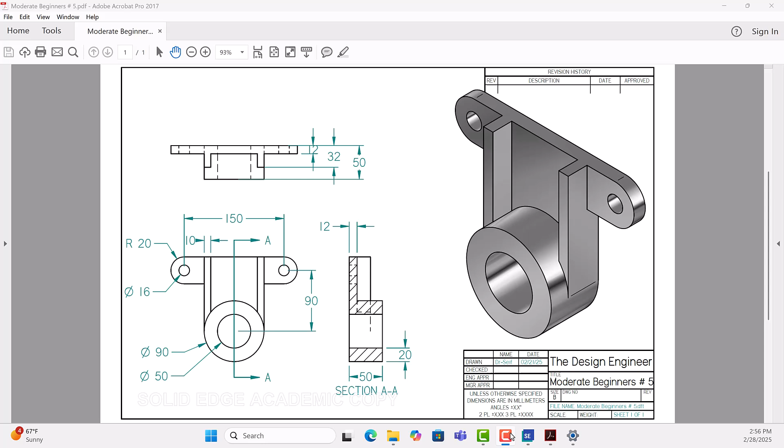Without further ado, let's go to Solid Edge. This is the main menu, and what I'm going to do is click on New.

I need the part, so I'll click on this one, ISO metric, since the dimensions are in millimeters. So I'll click on ISO metric part, click on this one, and say okay.

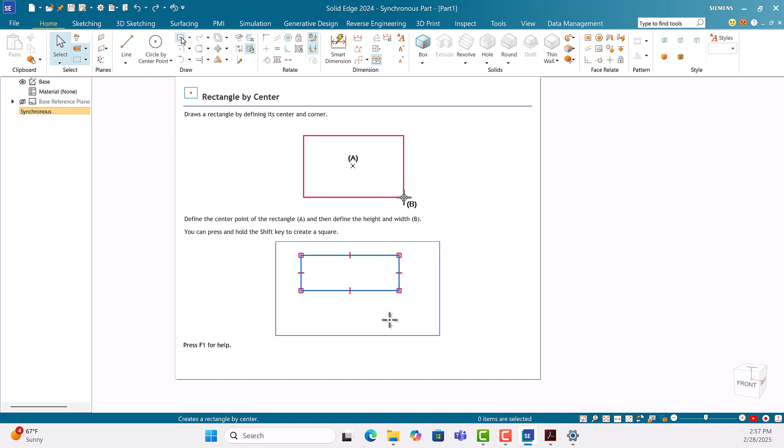As I mentioned, I'll start first with rectangle by center. So I'll go to Home, click on rectangle by center, and at the beginning don't put any dimension, just click on one of the drawing tools. So I'll click on rectangle by center, and the menu will come up.

I'm going to put it in from the other screen. So here is the menu, and at the same time all the projections have been revealed.

First, before I put any dimensions, I'm going to lock myself to the front projection. Once I touch any line of the front projection—this is front projection, this is the top projection, and this is the right projection—I'll touch any line in the front projection and click on the lock. Once I click on the lock, you see the lock posted in the upper right corner.

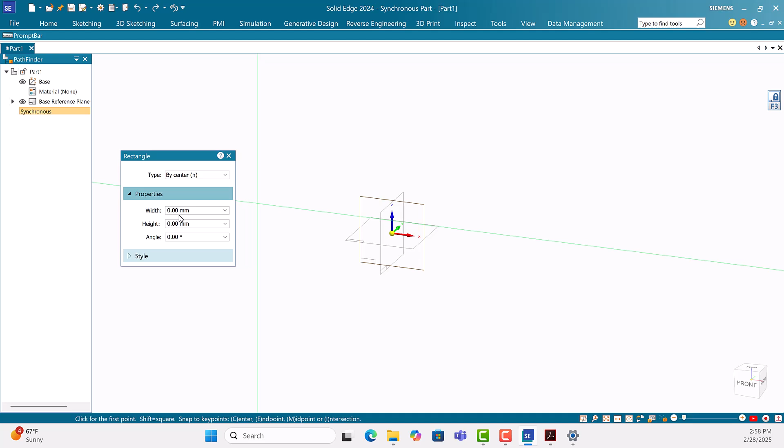Now that I'm locked, I can start putting in dimensions. We said the length or width is 150 and the height is 40, and the angle is 0. So I'll go to the cube, click on the front projection to get that front view, and take the rectangle and touch the center.

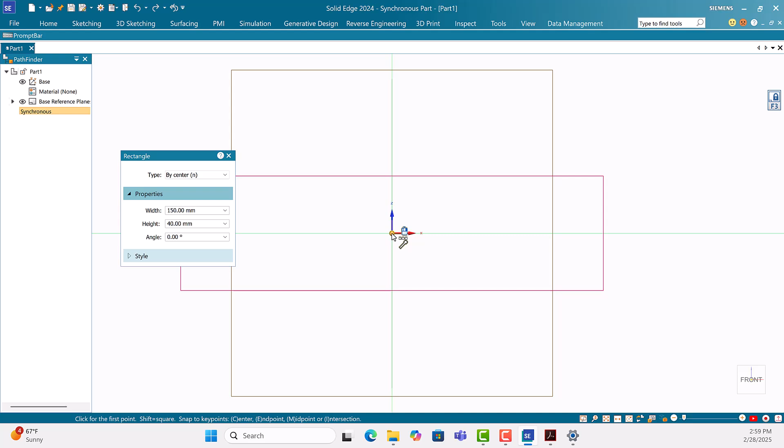Once you see the center of the coordinates, the center becomes orange, so click on the orange. Okay, I got it.

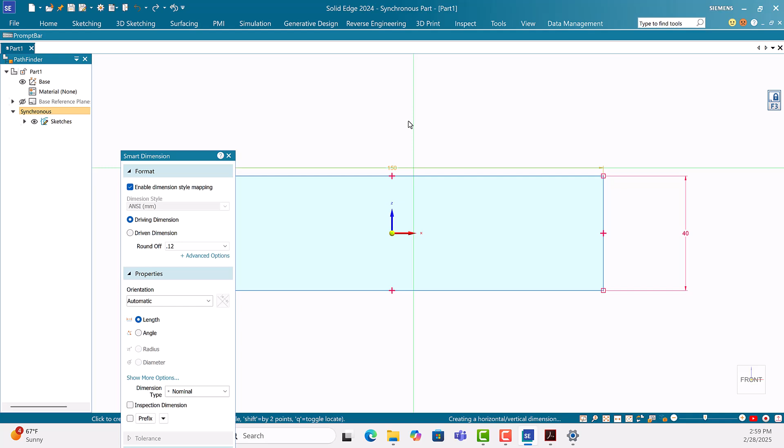Now let's make sure the dimensions are correct. I'll go to Home, get Smart Dimension, touch the edge here—this should be 40. It is 40. And this should be 150. It is 150. I'm going to use the roller to reduce the size so I can move it, and then move it up.

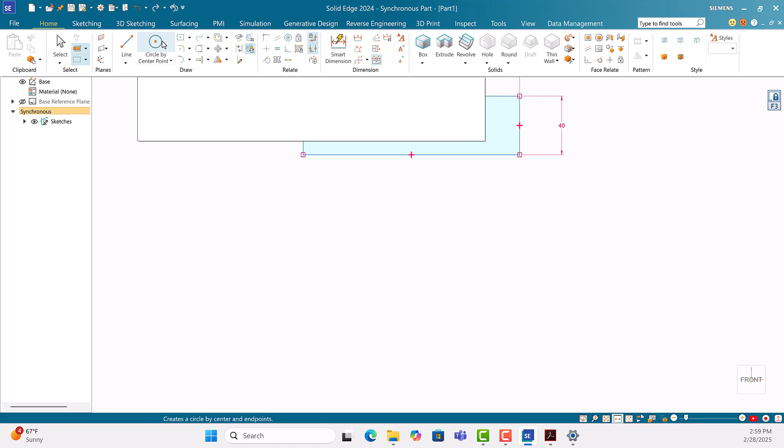The next step is I need to make the circles. So I'll go to Home, get circle by center, and this circle by center is going to be 40, and come exactly to the center of the edge here and click. Go to the other edge at the center, click, so I can get the shape.

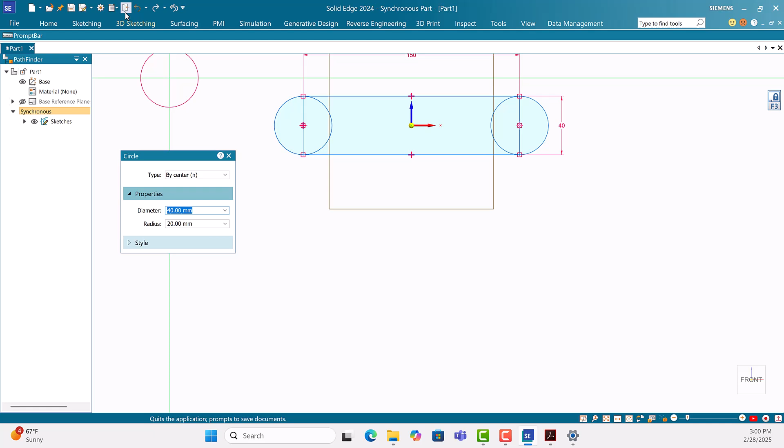Now I need to go to Home, use the Trim tool so I can get rid of the extra line. There's an extra line here on the inside, and another extra line here.

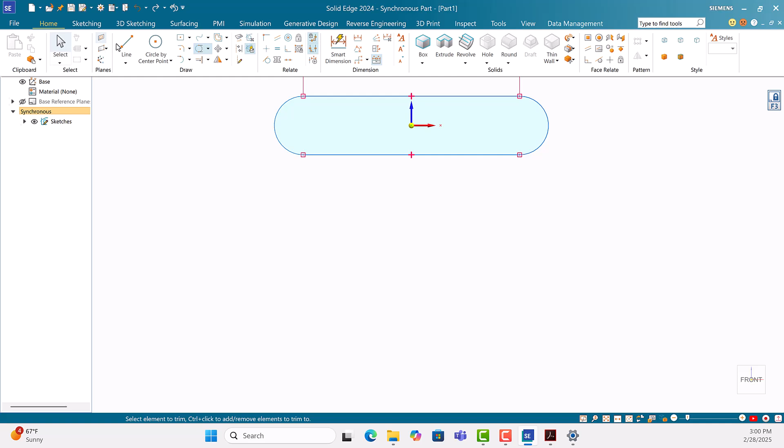Now I need to put the circle in the center of the bigger circle. So I'll go to Home, circle by center, and the diameter is 16.

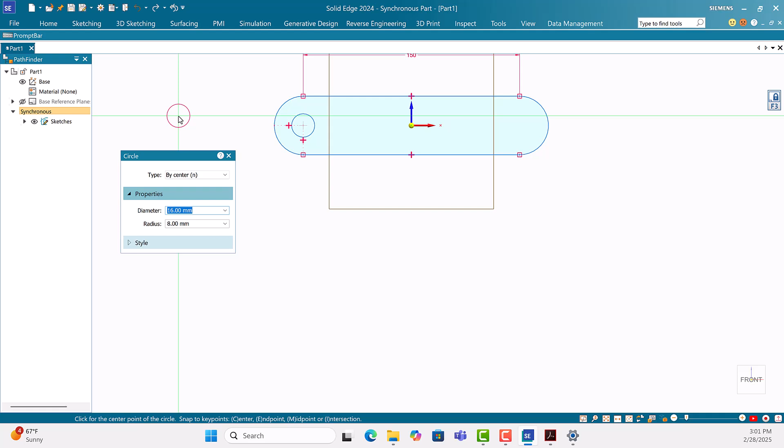Enter, and I'm going to come exactly in the center here, and move slowly till I reach the center of the bigger circle. Once I see concentric, I'm going to click. Touch the center and go horizontally. Once I see concentric, I'm going to click. And I click it right because I see the plus in the coordinate of the shape.

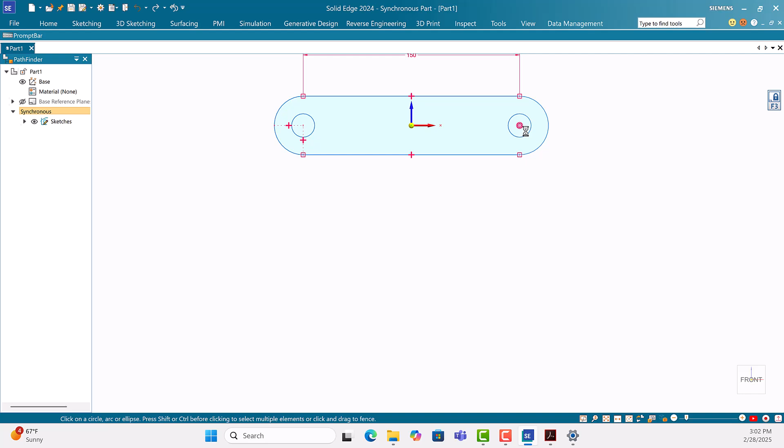I'm going to do the same on the other side. Come to exactly the middle and go horizontal till I see it concentric. Now let me fix that. I'm going to go home, and you see the relationship concentric. Click on concentric, and I need this small circle to be concentric with the bigger circle. See, now they are concentric. I'm sure it is concentric, but just to be on the safe side.

Next step is we need to do the circles 90 and 50, so the one at the bottom. I'm going to go home, circle by center. The first circle is 90. I'm going to put 90, touch the center here, and go vertical. Once I see the line, the dotted line, you see it? Click. How do I know it's done right along the vertical axis in the middle? You see this red dotted line - it means it is done perfect.

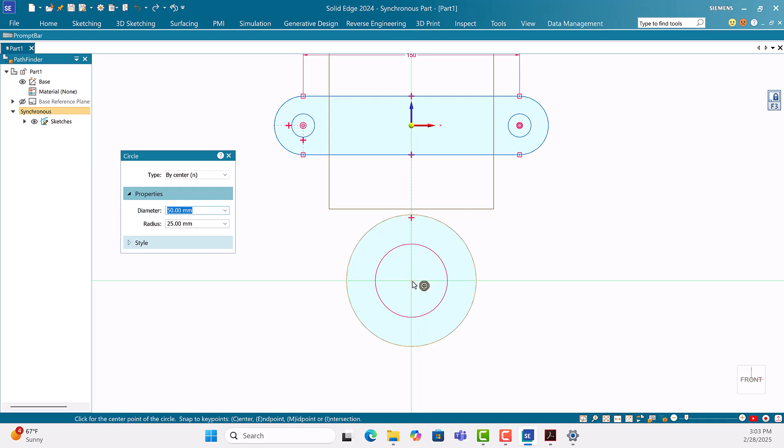The other one is 50 instead of 90. I'm going to put the second circle as 50. I'm going to touch the bigger circle to reveal the center. Once I come to the center, I see concentric. I'm going to click, lock the dimension. I'm going to go home, get smart dimension, get the dimension of this, click on this one - it should be 90, it is 90 - and the other one here is 50.

Let's get the other circle. This should be 20, radius 20, good, and the diameter here is 16. Let's make sure the other one here is 20 and 16. So I got all these done.

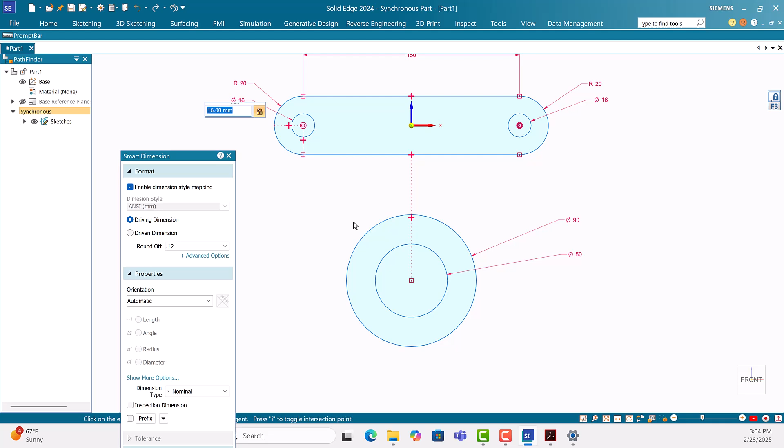We'll proceed with the rest of the drawing. We'll go home and get a line. I'm going to draw a tangent to the circle here to intersect with the top line here. I'm going to click at any point near the center. Now it's moving with me. I'm going to go vertical. Once you see the vertical symbol, I'm going to click. Right click to get out.

I will repeat the same on the other side. I'm going to click here to touch the circle and draw a vertical line. When I see vertical, I'm going to click. Right click to get out. Now I'm going to use trim to get rid of the extra line here and the extra line here.

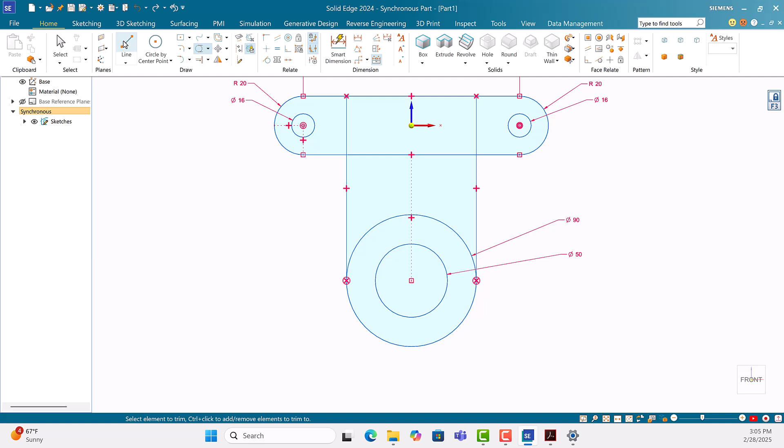I need to draw a line parallel to this line, so I'm going to get line again. I'm going to choose any point and then correct it. I'm going to draw a vertical line. Once I see the vertical symbol, here it is - once I see the symbol vertical, I'm going to click.

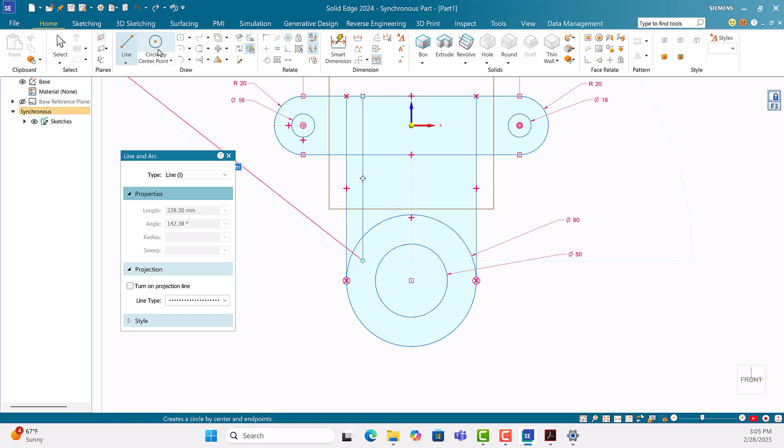Home, trim, get rid of the extra line. Now we need to make sure the dimension, or the spacing between the two lines, is 10 millimeters. So what I'm going to do is use X dimension, X distance between this line and this line - this should be 10. So I'm going to correct it to be 10, put 10.

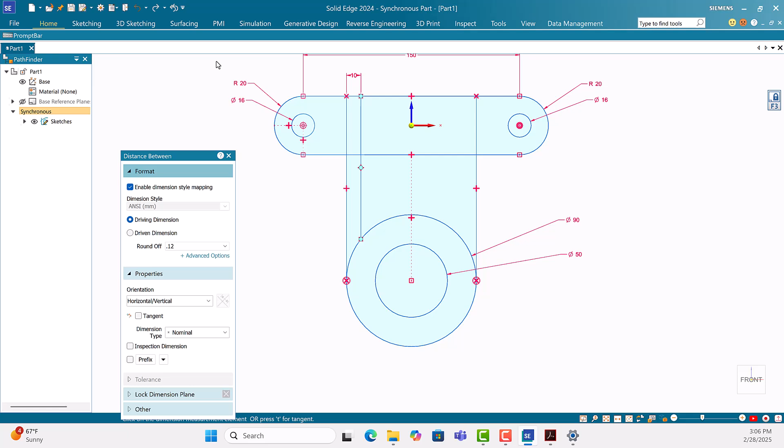I need to draw the same line but on the other side. How can I do it? I'm going to use the mirror - home, mirror, highlight this line, and click on the coordinate axis. So now it will create the mirror. Now I created an exact mirror of the line.

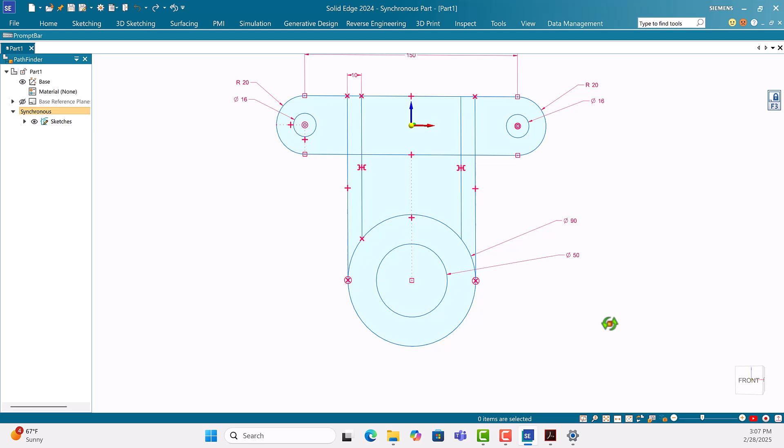Okay, so now we're almost done with the shape. Now I'm going to escape. I'm going to just turn it around a little bit, turn it aside a little bit. I'm going to try to do the extrusion.

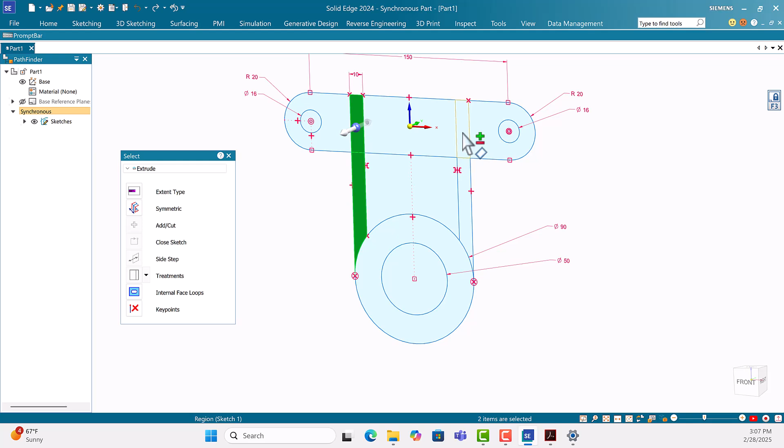So I will start with the ribs here. What I'm going to do is go home, select, click in this area, and then put your finger on the shift key while you highlighted this one green. Put your finger on the shift key and click on this area here, inside this area, and inside this area. Now remove your finger from the shift key and click on the arrow - this should be 32. So I'm going to put 32.

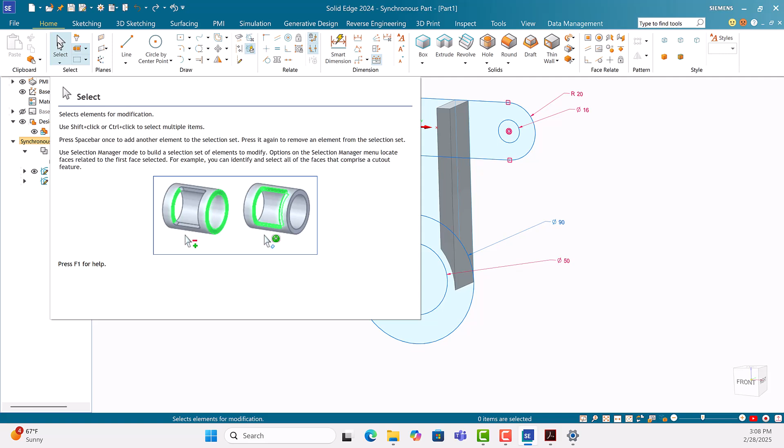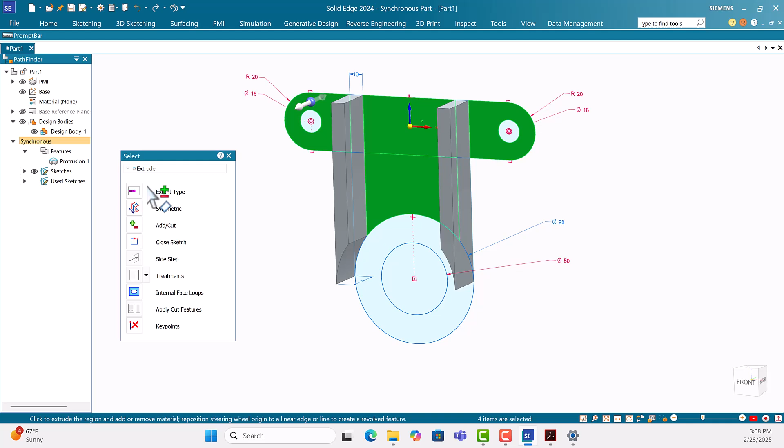I will repeat. I'm going to click on one of these sides here. Use home and select the arrow, click inside the shape here - this becomes green. Put your finger on the shift key and click on this area here, this area, and the back area here. Now remove your finger from the shift key and click on the arrow here. This should be plus - add. I'm going to click on the arrow and I want this one to be 12, so I'll put 12.

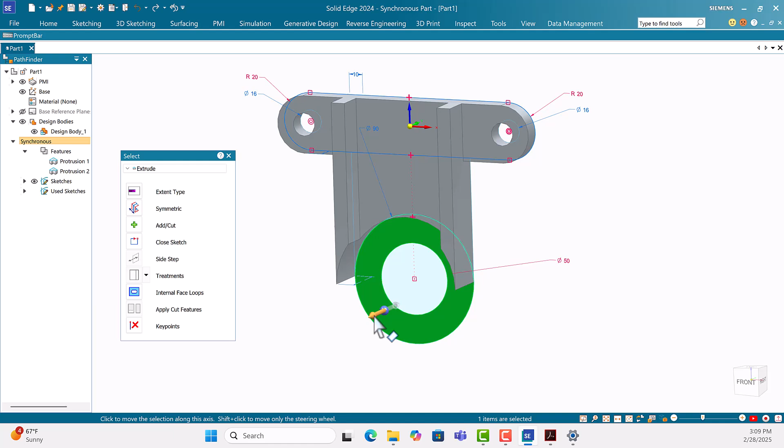As you can see, I was able to finish the part by just concentrating on the front projection. Okay, now before I move forward, here's what I'm going to do.

I'm going to go to View, and under View, I'm going to use Color Manager. For the part itself, I would like to have it made of chrome, so when I put it in a draft sheet it will look fancy, if you like the look. I'm going to expand this one, look for chrome, select it, and say OK.

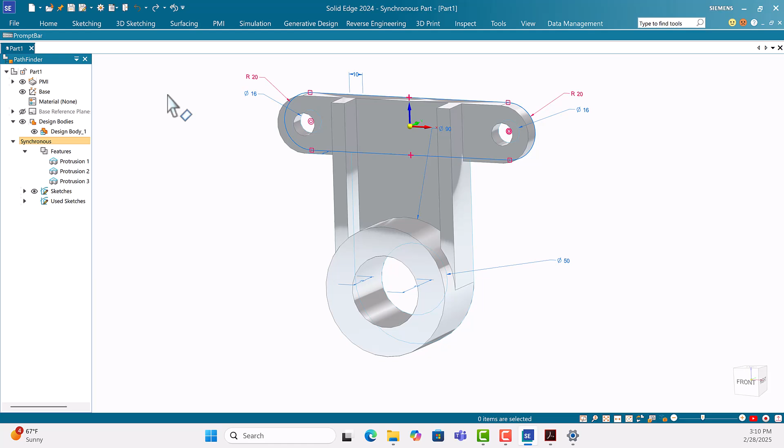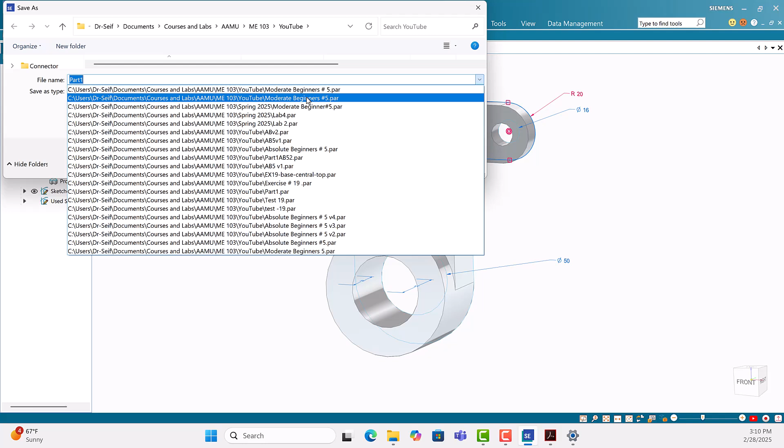See, now the part is made of chrome, and the next thing is to save the part. So we are done with the part, now it's time to save it. Save as. I'm going to go down till I see Moderate Beginners 5. I believe this is the one, Moderate Beginners 5. Yeah, okay, say save.

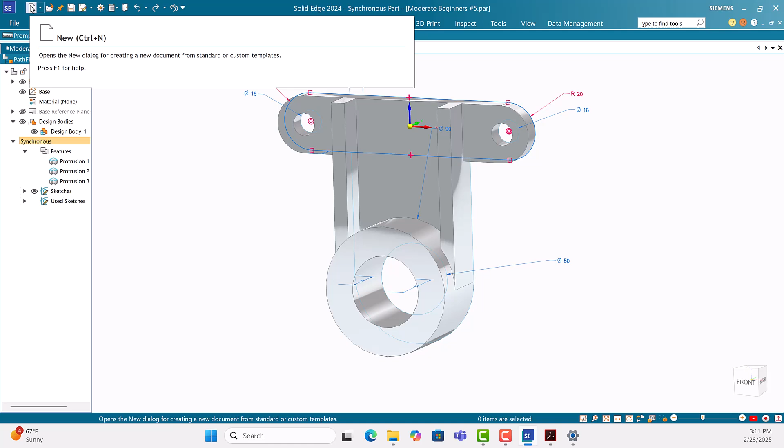So now we need to draw. To finish the part, I need to draw the draft sheet. So how do I do the draft sheet? I'm going to click on New, and under New ISO Metric you have the menu. I need to look for the draft, so I use ANSI metric draft.

So this is the one, I'm going to highlight this and say OK. This will bring me the menu for the draft sheet. So now we have a new sheet. Double click on sheet 1, and under background, if it's not highlighted, highlight the background, then expand the sheet and choose B sheet. Okay, when you choose B sheet, say OK.

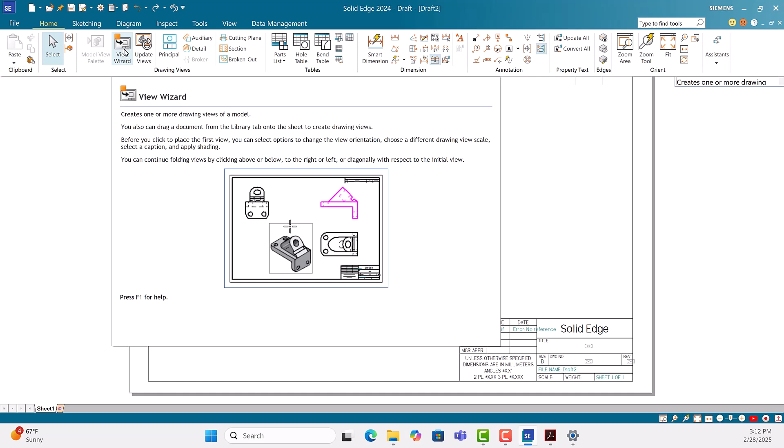It will come smaller, so what you need to do is go to the fit command to make it fit. Now the next step is I go to View Wizard. Click onto View Wizard, and automatically it will take me where we saved the file. I can just go down till I see Moderate Beginners #5. Here it is. 27, okay, that's good. So say okay, open.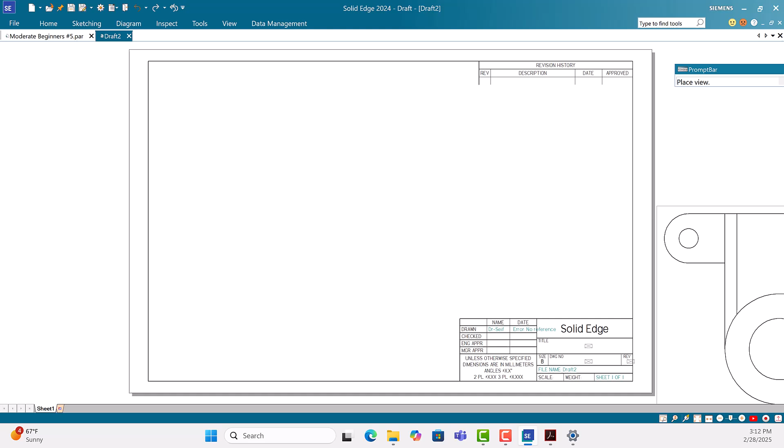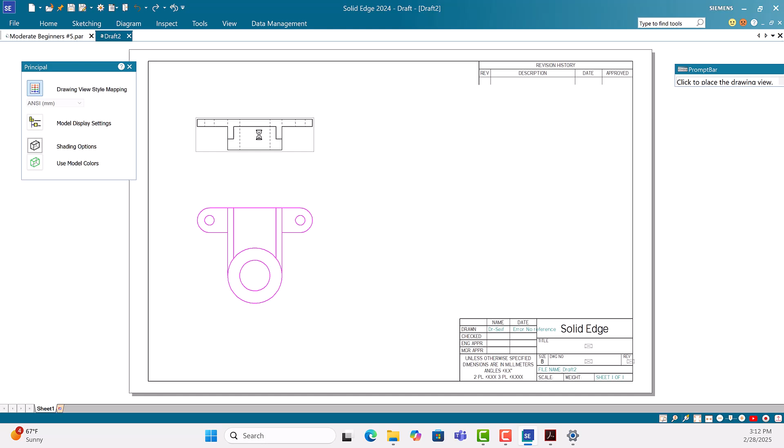Where is the menu? Okay, here is the menu. I will start first by getting the projection, so I'm going to say 1 to 2. So I get this is the front projection, this is the top projection. There is no need after that.

So now what I'm going to do, I'm going to get this, this is isometric. I'm going to click it here, just escape. Where is escape? Here it is. Okay, highlight this one so I can move it, and I'm going to put it somewhere here.

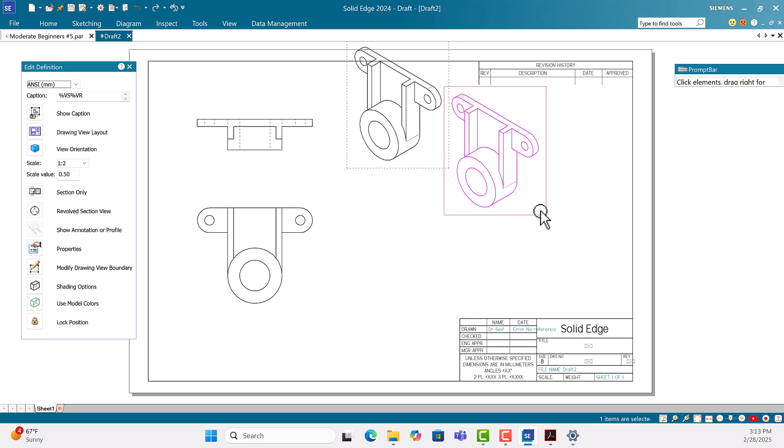Okay, now I need to change the scale. I'm going to scale it 1 to 1, so it becomes bigger. I'm going to make it like this. That's good enough, this is good enough.

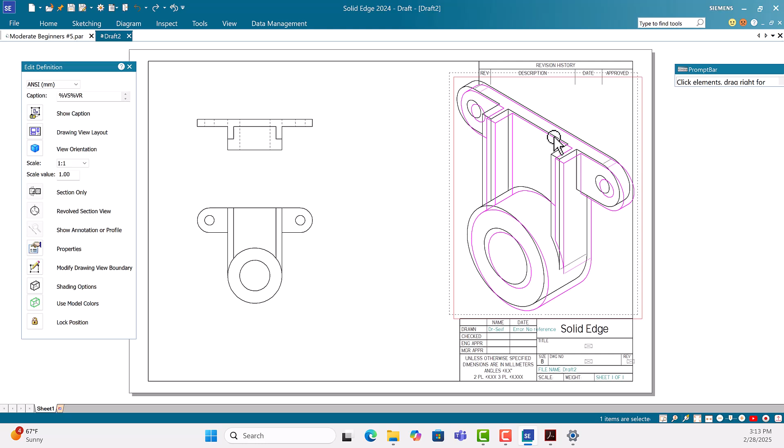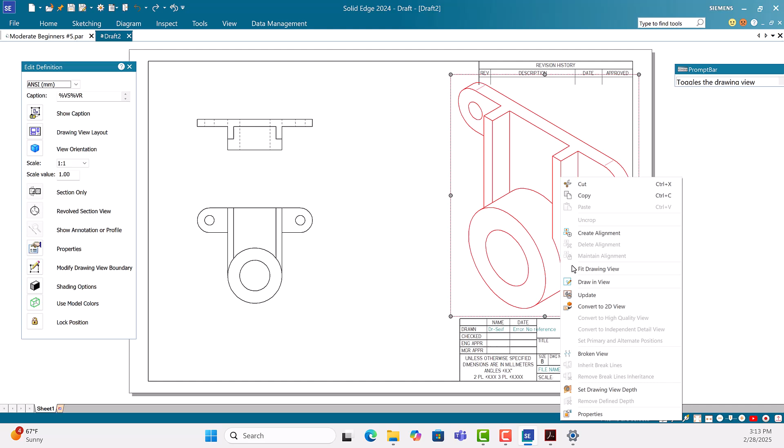Okay, and also I'm going to choose the shaded option. Let's see, under shading option, click on the shading option and choose the last one, grayscale shaded with edges. Go back to the same drawing, right click on it, and say update. Once we update it, it becomes shaded and it looks the very nice color of the chrome.

The next step I need to do is put the dimensions. So what I'm going to do is put this one somewhere here. I'm going to go to Home and start putting the dimension. But before I do the dimension, I need to do the section here.

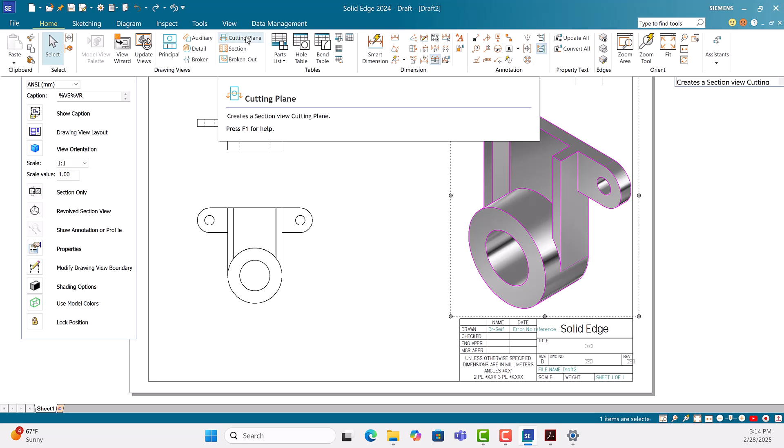So how can I get the section? To do the section, you need to do two steps: identify the cutting plane, and then do the section. So I'm going to click on cutting plane, and then choose the cutting plane will be in this drawing here.

The way to do it is you start from the center here, and go along the center line. Once I see a dashed line, it means I'm in the right direction. Click. Now I click the beginning of the line, and then click at the end. Once I see the line is vertical, I click again. This way I got the section, the plane of the cutting plane. And I'm going to go to escape.

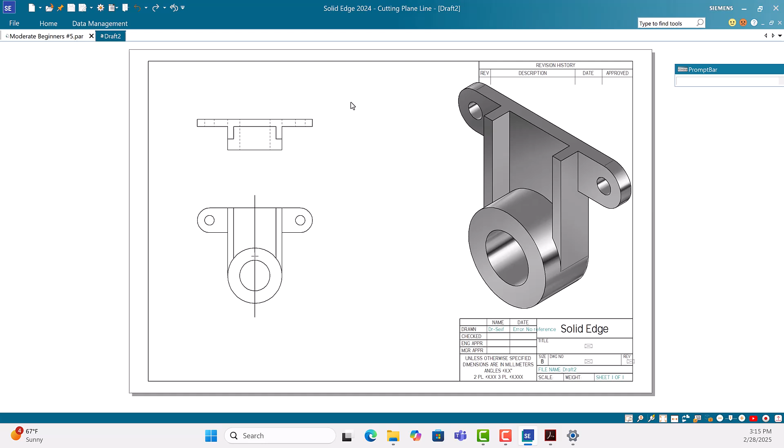Okay, you go back again to Home, and you say close cutting plane. Close cutting plane.

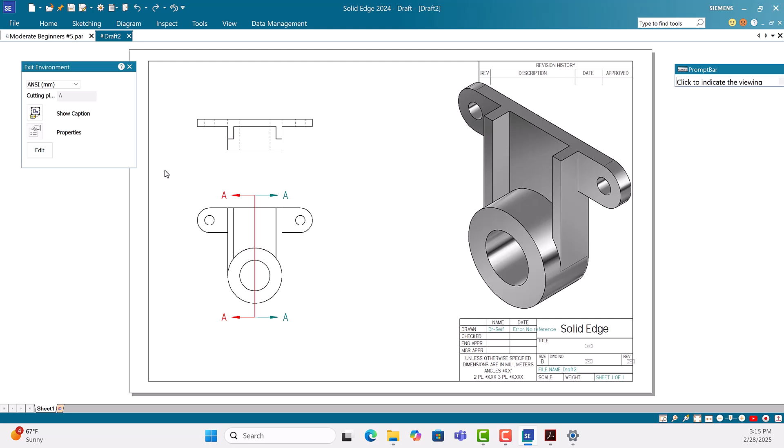Okay, so now because my mouse was to the right, the arrow is to the right. If you move to the left, the arrow will go to the left. So let's keep it to the right. And then what I'm going to do is just go back here and do it this way, okay.

Now we need to create the section. I'm going to click on this one, you see, this is the section. Click on it and it will create the section. Let me go to home, choose select so I can move the right section here, move it down a little bit, and start putting the dimensions.

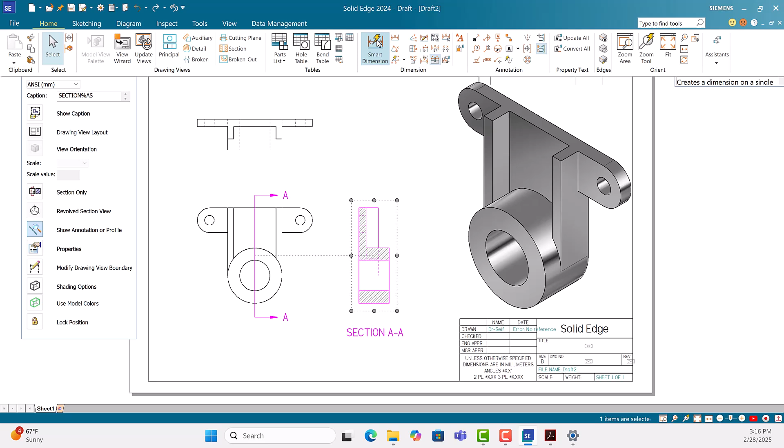So home, smart dimension. Under smart dimension, I'm going to use a scale 2. So this should be the 12. It is 12.

Here is 12, okay. And then from this edge here to the edge here, that should be the 32. And from the edge here to this edge here, this should be the 50. So I got this dimension correct.

Let me get this one. This is the 12, good. This line here to this line, this is the 20, good. And this the 50, okay, good.

Let's do this one here. So this radius is 20. And this, the diameter here, is 16.

And from this center to this center, click to this one, it's a 90. And then the circle here is 90, and the other circle is 50. Very good, okay.

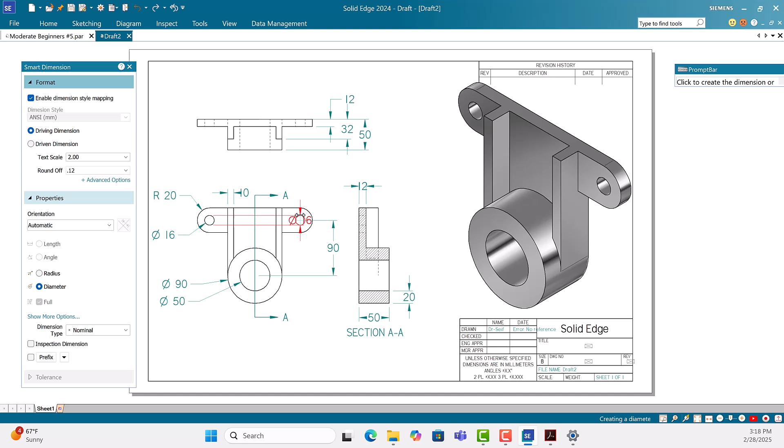And this one is from this line of this edge to this edge is the 10. Okay, we put it the 10, you can put it somewhere here, that's good enough. And from the center here to the center here, this should be the 150.

Now I need to put the title. So how to put the title? I'm going to go back again to home, and under text, select the text. This is the text, and I'm gonna use a font 1.75 bold, and I can type it any place I want, and then I can move it. So I'm gonna type it somewhere here. I'm gonna type moderate beginners.

Number 5, good. So I'm gonna go to the home and choose select the arrow, highlight this one. Once I grab it as the plus sign, I'm gonna grab it and just move it to be exactly in this location. Okay, what else?

Oh, the next step is I would like to show you how to change the title here. To change the title here, you have to go File. Okay, let me save the file. So I'm going to say Save As, and automatically it will name it the right name we use for the part.

So it's going to be Save. So I'm going to say Save. Say Yes, okay, override the old version we have. Okay.

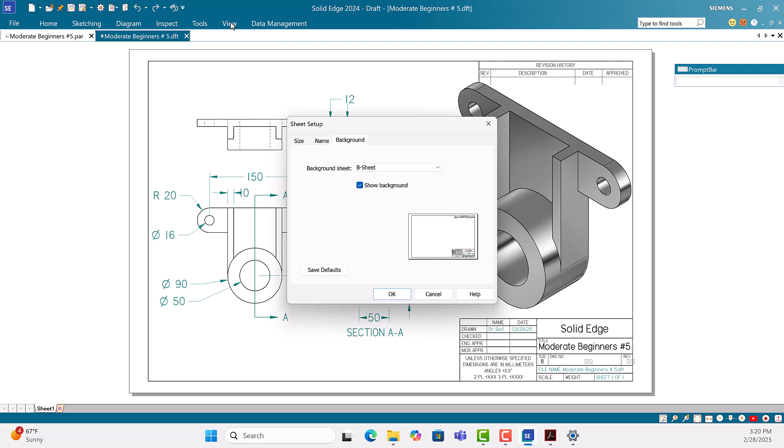So now I need to go back to View. Say View here, say OK. View, and say Background here. Click on the back, highlight the background, or make it active. So once you make it active, you will see that all the sheets will be listed. Sheet A, B, C, and D. So I'm going to click on Sheet B.

If you look at Sheet B, it doesn't have anything, just because, okay, this is the template. Now we need to change the template. So what I'm going to do, I'm going to go back here, highlight this one, and change it to be the design engineer.

The design engineer, just click, enter. Okay, so click OK. So now we change the title.

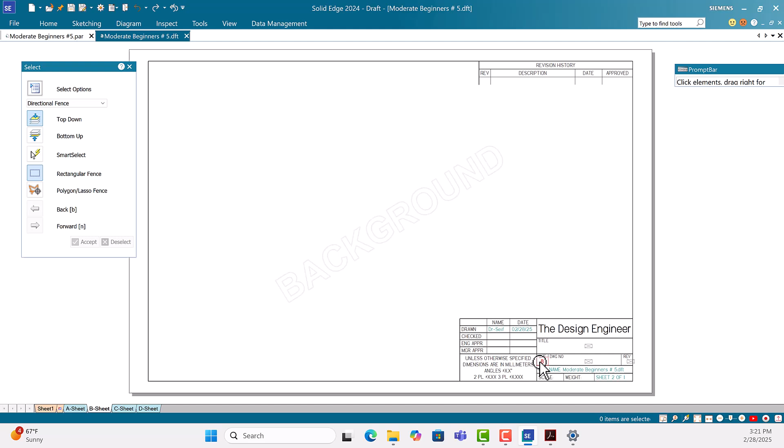Now I need to get, somebody asked me about how can I get rid of these envelopes. So just you highlight it, because we are in the background, you highlight it and just delete it. Highlight this one too, and delete it. Highlight this one and delete it.

Okay, now there is no need now to work with the background, so I'm going to say View, click on View, and once you just turn the background off, click on off, so all the sheets will disappear, and it came back to the original one. Okay, the one we are working with. Okay, so this.